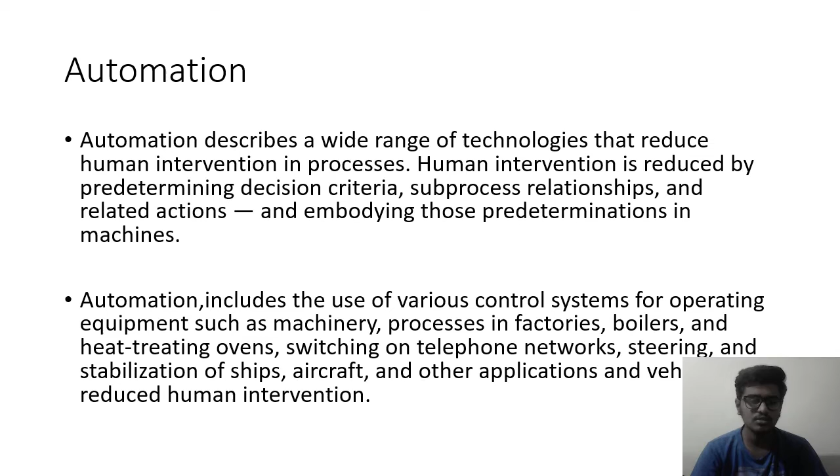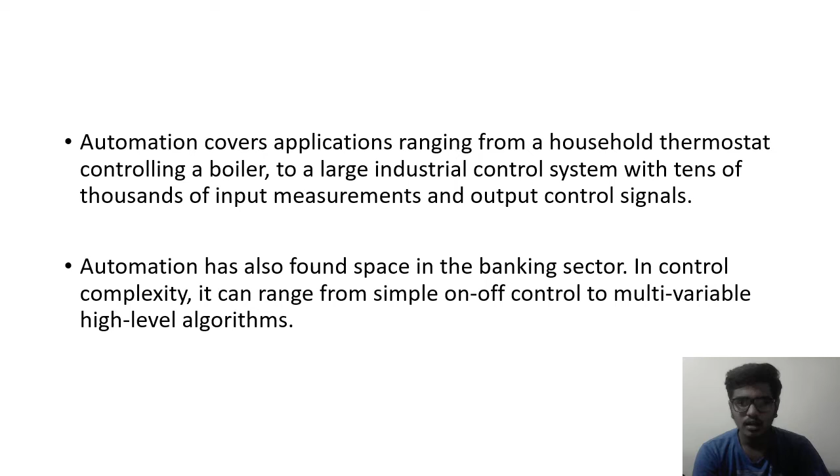Automation covers applications ranging from a household thermostat controlling a boiler to a large industrial control system with tens of thousands of input measurements and output control signals. Automation has also found space in the banking sector in control complexity. It can range from simple on-off control to multivariable high-level algorithms. So this is about automation and its uses and applications.

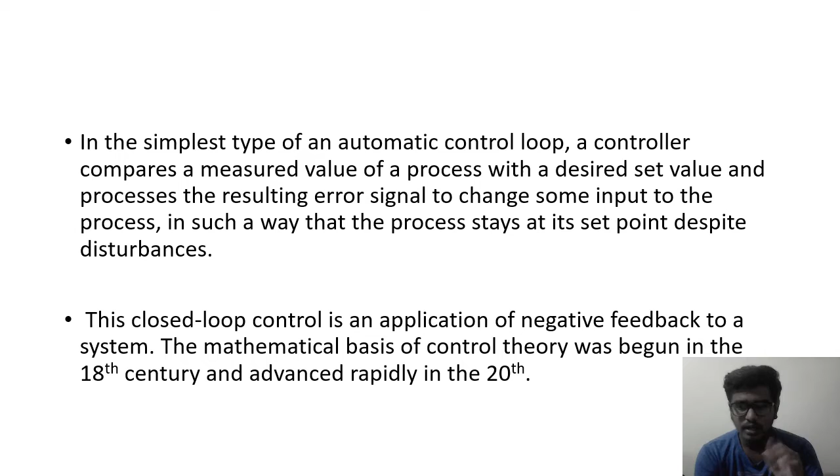So, in the simplest type of an automatic control loop, a controller compares a measured value of a process with a desired set value and processes the resulting error signal to change some input to the process, in such a way that the process stays at its set point despite disturbances. So this is about automation, and let us see some more slides.

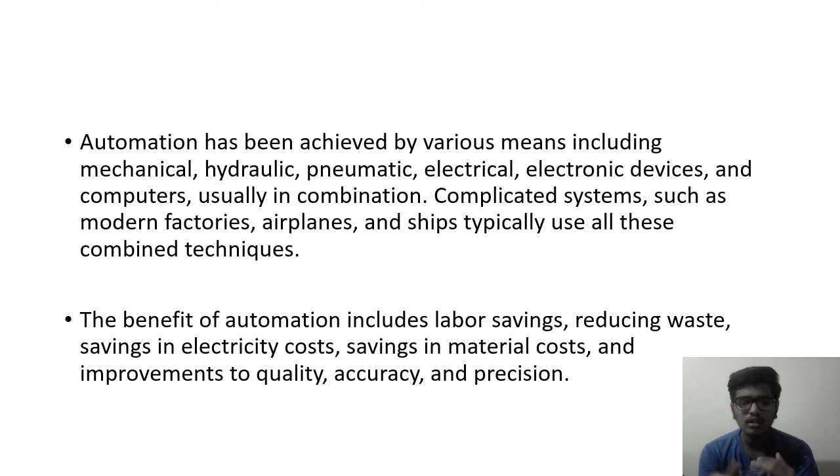Automation can be achieved by various means, including mechanical, hydraulic, electrical, electronic devices, and computers, usually in combination. Complicated systems such as modern factories, airplanes and ships typically use all these combined techniques through automation.

So let us know open loop and closed loop control. Closed loop means feedback control. In open loop control, the control action from the controller is independent of the process output or controlled process variable. A good example of this is a central heating boiler controlled only by a timer, so that the heat is applied for a constant time regardless of the temperature of the building. The control action is switching the boiler off and on, and the process output is the building temperature. So this is about open loop control.

The main theme of this is that the control action from the controller is independent of the process output, or we can say the control process variable. And the example we know is a central heating boiler controlled by a timer, so that the heat is applied for a constant time regardless of the temperature of the building.

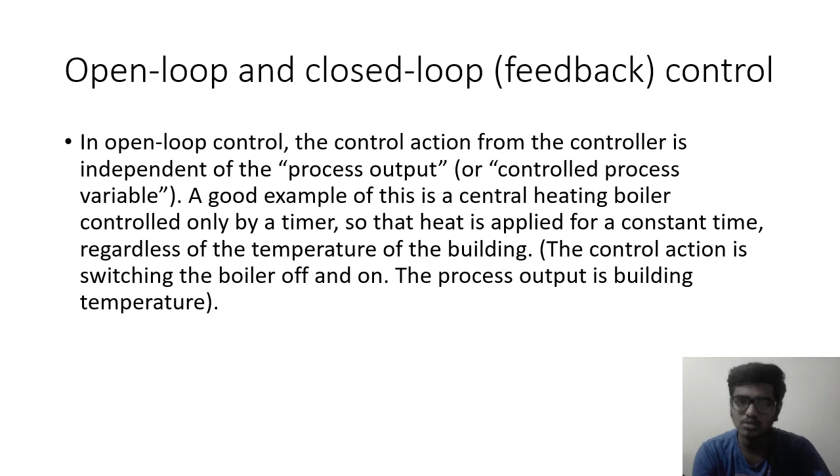Let us see some other slides and know what is closed loop control, that is feedback control. In closed loop control, the control action from the controller is dependent on the process output. In the case of the boiler analogy, this would include a temperature sensor to monitor the building temperature, thereby feeding a signal back to the controller to ensure it maintains the building at the temperature set on the thermostat. A closed loop controller therefore has a feedback loop that ensures the controller exerts a control action to give a process output equal to the reference input or set point. For this reason, closed loop controls are also called feedback controllers.

So, in closed loop controls, the control action from the controller is dependent on the process output. In the boiler analogy, this would include a temperature sensor to monitor the building temperature, thereby feeding a signal back to the controller, ensuring it maintains the building at the temperature set on the thermostat. A closed loop controller therefore has a feedback loop that ensures the controller exerts a control action to give a process output equal to the reference input or set point. For this reason, we call closed loop control a feedback controller.

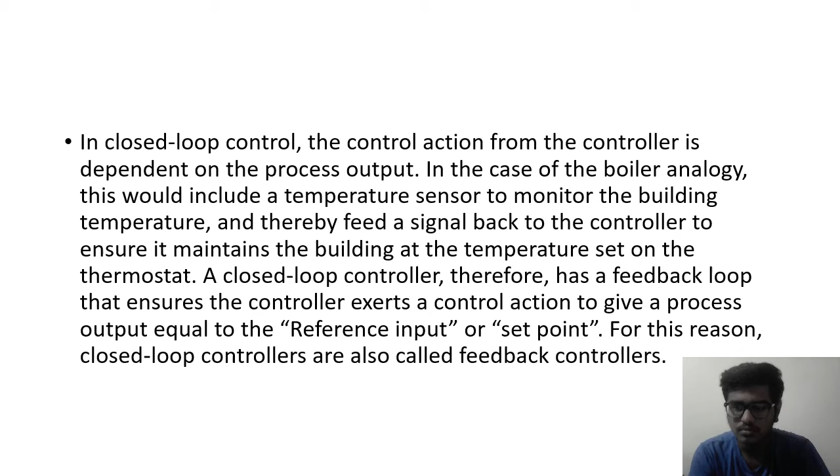So, this slide says engineers now have numerical control over automated devices. The result has been a rapidly expanding range of applications and human activities, and these computer-aided technologies serve as mathematical or organizational tools. Examples of CAx include computer-aided design (CAD) software and computer-aided manufacture (CAM) software. The improved design, analysis, and manufacture of products enabled by CAx has been beneficial for industry.

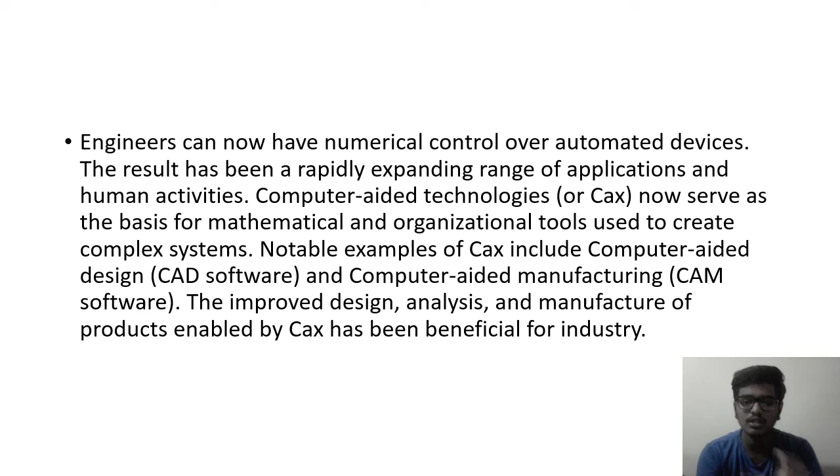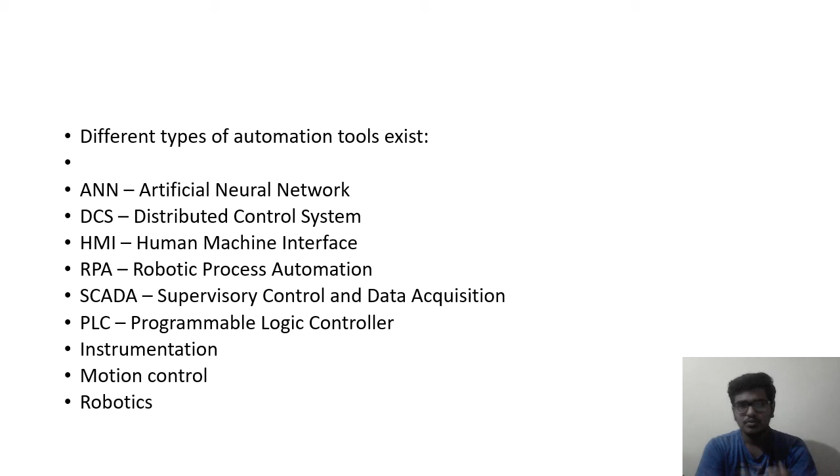This is about automation and its tools, and the open and closed loop controller. This is about this, and thank you. This is about automation.